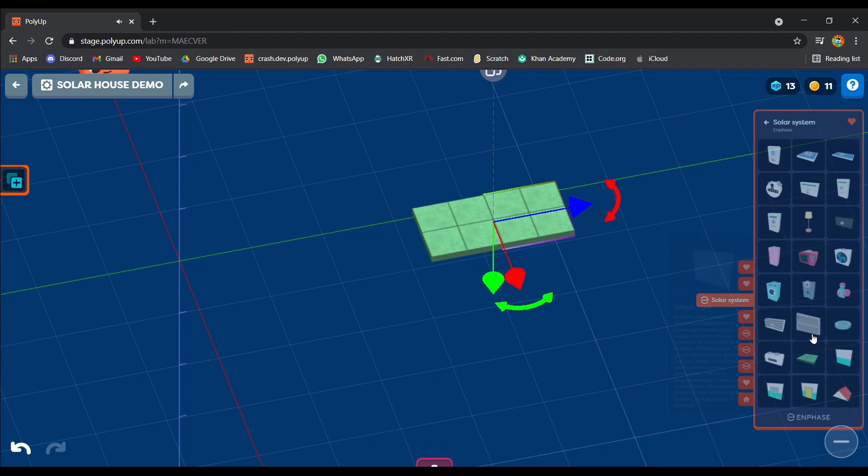In the previous video, I explained how the parts work, and in this video we are going to be constructing a house. Let's start with the floor. Now I'm going to add the walls. And finally our roof.

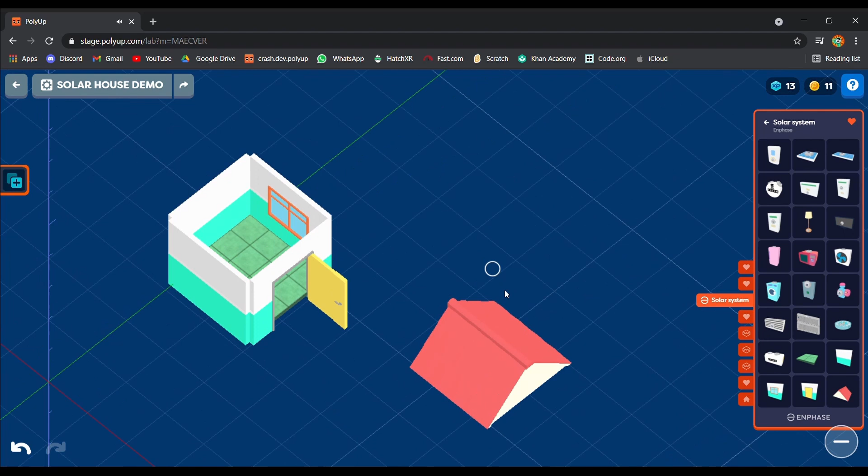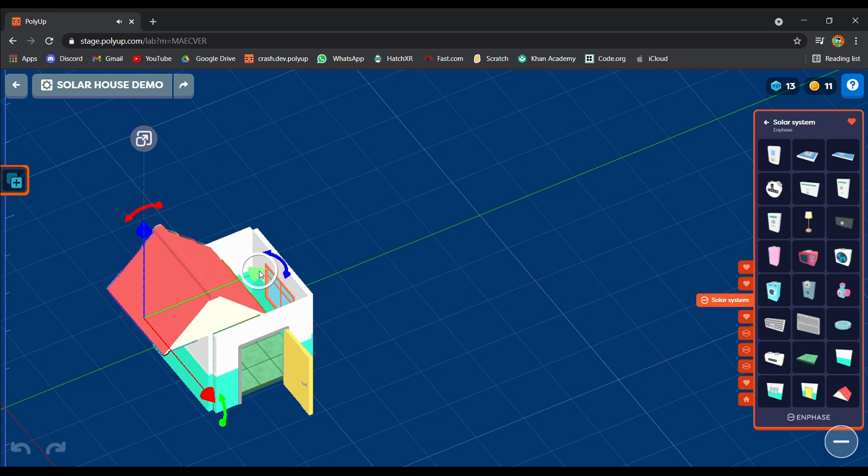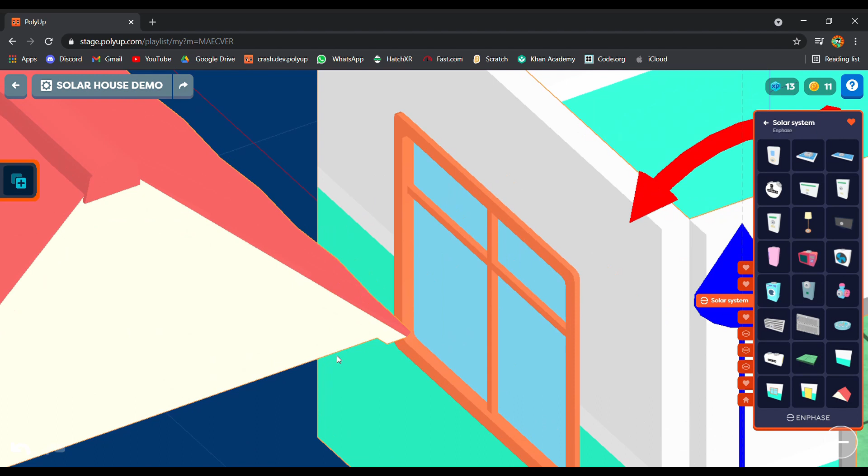Now I'm going to add some other stuff that will help us. For that, I am going to slightly move the roof with the help of these arrows. Remember, shifting the roof does not mean we are disconnecting it, because when I click on the first tile, that is the parent object, everything highlights. It has an orange glow near it, which means they are all connected.

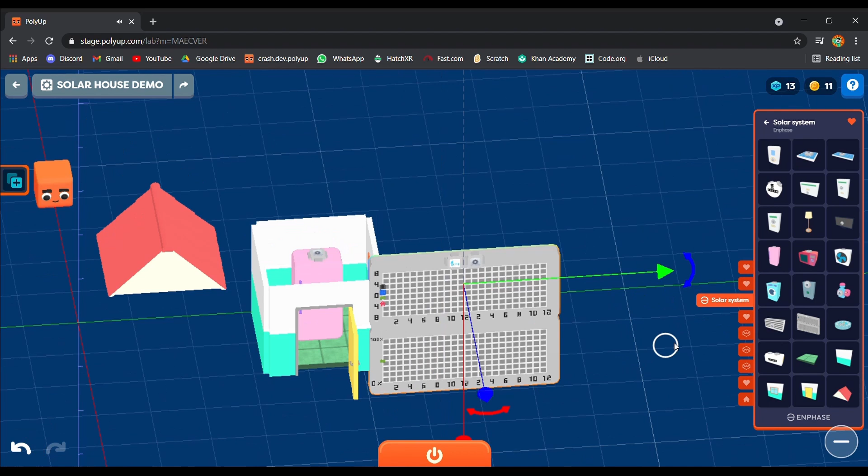I am going to add a fridge because we can monitor it the whole time, as it is on throughout the day and night. Let's also add a graph so that we know what is happening. I'm also going to add a clock to know the day or night time. And finally, a device electric meter or the power grid meter.

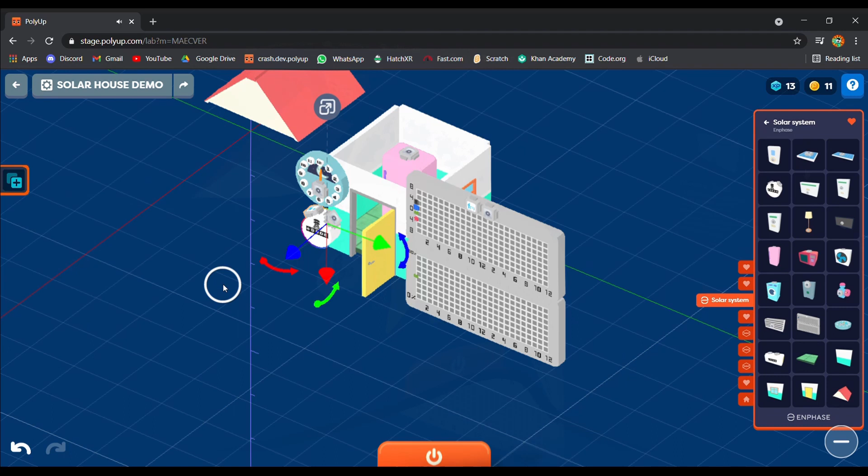Since no key elements, that is no microgrid controller, solar panel or battery is connected to this house, the appliance won't work. But something interesting happens when we add a circuit box, that is the microgrid controller.

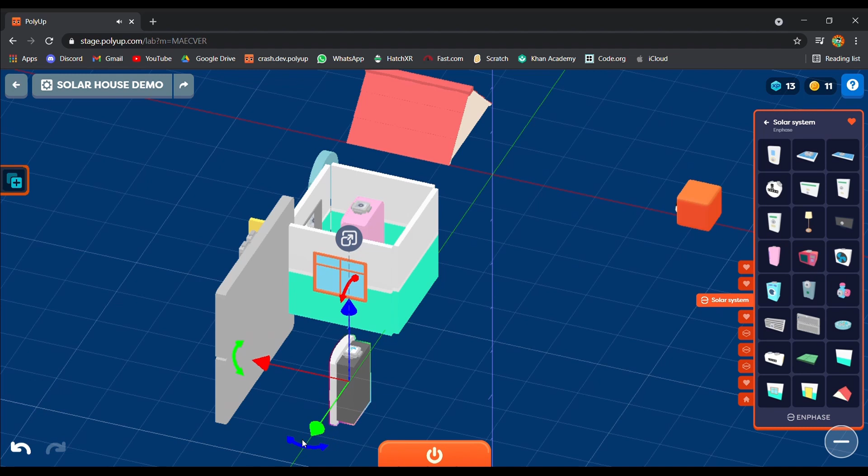As you can see, the fridge is working. That is because the electricity is coming from the power grid. We can see it on the power grid meter and on the graph.

On the graph, the black line represents the power grid, the blue line represents the solar panels, and the green line represents the battery. The red home icon represents appliances.

As you can see, on top of the center line, there is a black line, which means the electricity is coming from the grid. And below the center line, there is a red line, which means it's going to the appliances. We can see that on the circuit box as well.

If the circuit box is blue in color, it means there is full power. If it is green, it means the appliances have full power. And if it is lime green like this, it means the batteries have full power. If the circuit box turns yellow, it means it is taking power from the grid. And if it is orange, it means the batteries have some amount of electricity in them. If it is red, it means there is no power.

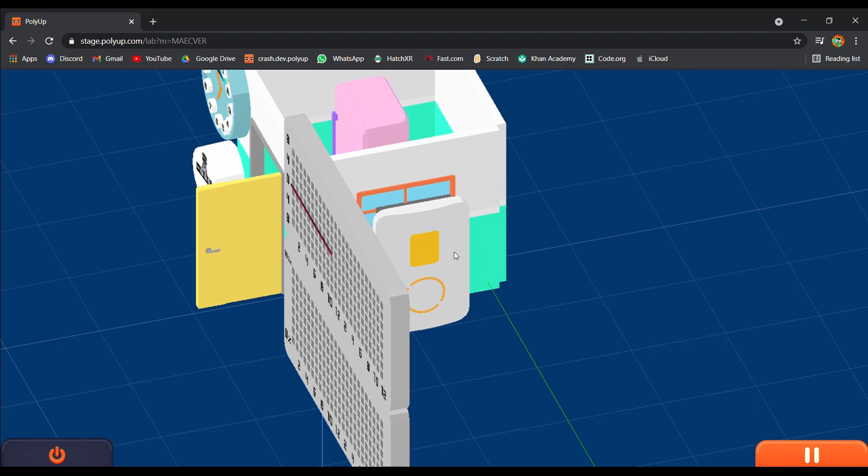The fridge did not work when we did not have a circuit box because the circuit box controls the power usage of appliances. Without it, we cannot get electricity from the source.

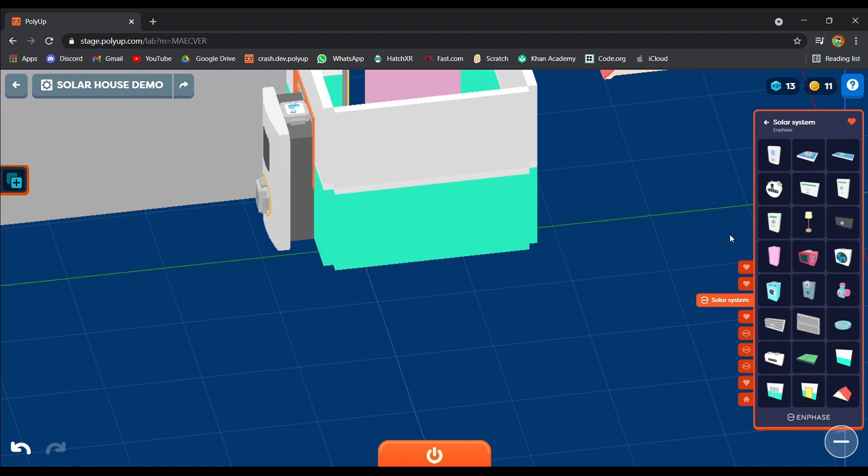Now I am going to add some batteries so that we need not get electricity from the power grid, at least for a few days. These batteries charge with the help of solar panels, but we are not going to add that now.

Let's see what happens when we add only the batteries and the circuit box. As you can see, at first the batteries supply electricity to the home appliances. This is because by default the battery starts with 100% charge, and we can see its percentage on the bottom part of the graph.

We can also see on the device electric meter, that is the power grid meter, that no electricity is coming from the grid. But let's wait and see what happens when the batteries run out of electricity.

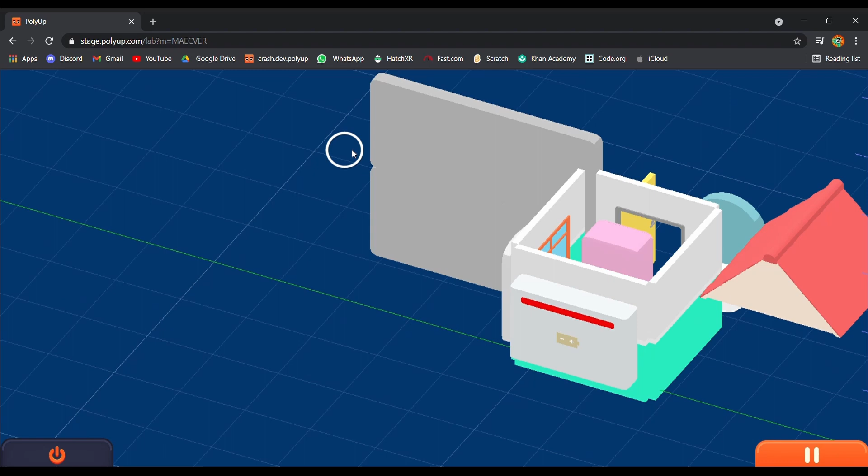As you can see, the batteries have 0% electricity, and the electricity is coming from the power grid, which is the black line. As you can see, the battery is red, which means there is no electricity in the battery. If the batteries are red, it means very low or no power.

If the batteries are orange, it means power is draining from the batteries. If they are green in color, it means the batteries are full. If the batteries are yellow in color, it means they are about to be full.

But now I am going to add the solar panels. As you can see, now the batteries are charging with the help of the solar panel, and our house is self-sustainable.

As you can see in the power grid meter, that is the device electric meter, no electricity is coming from the grid, which means there will never be a power outage in our house even if there is a grid outage.

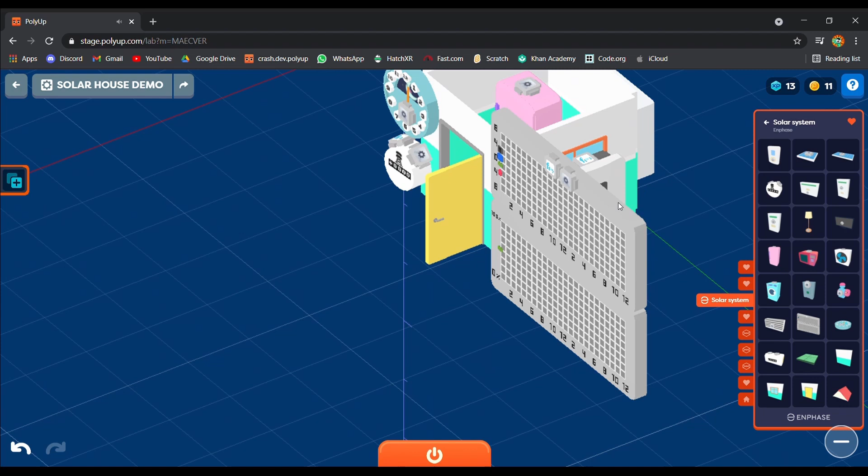But when more appliances are connected and there are less solar panels and less batteries, it will be hard to supply the house load, so it will take electricity from the grid. Let's add some appliances and try it.

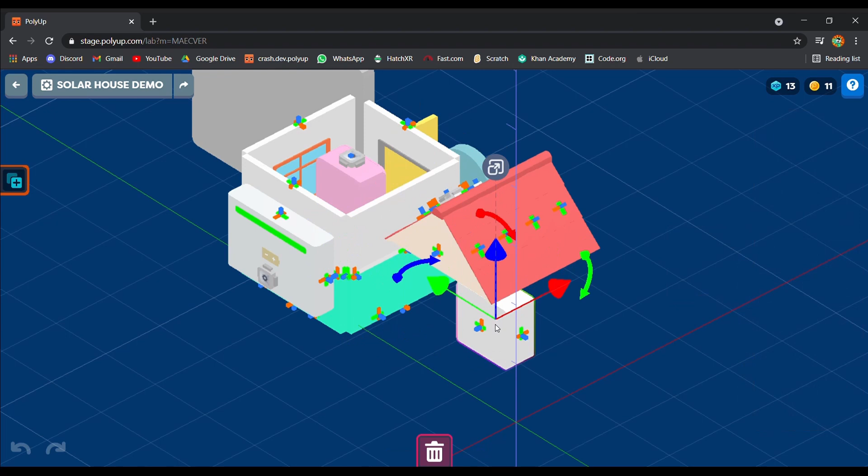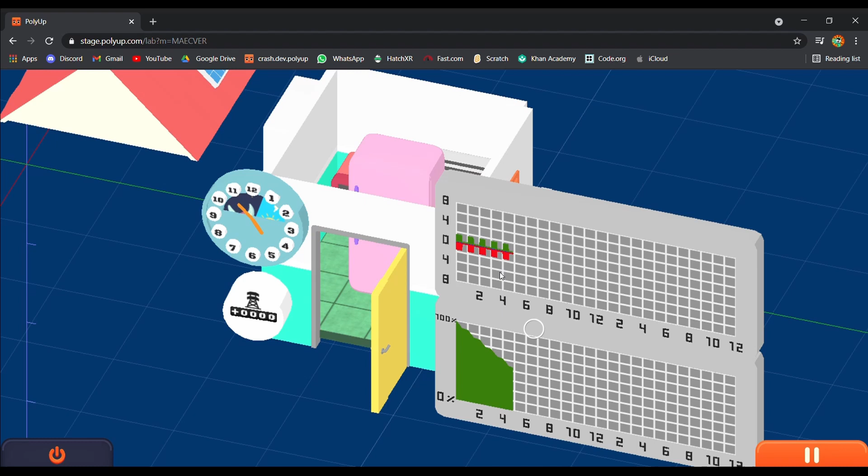As you can see, there is more load and the battery's charge is going down drastically. As you can see, the battery's charge is finally over and the power is coming from the grid. You can see that on the grid meter as well.

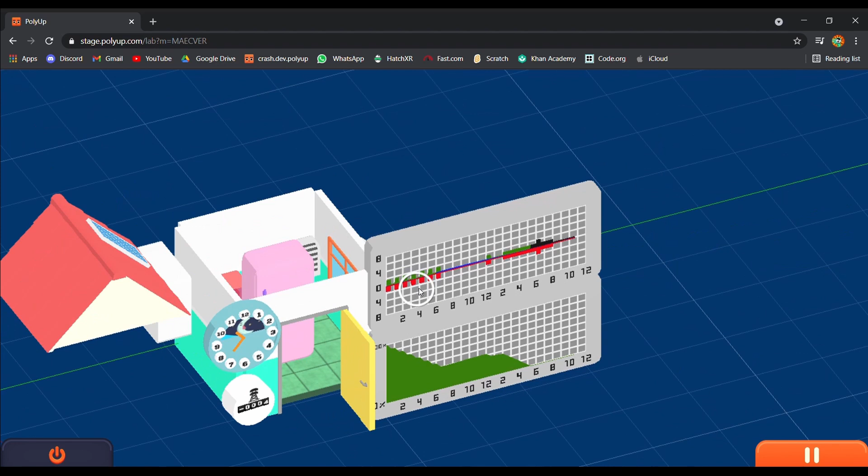If we want our house to be fully self-sustainable even in this situation, we need to add more solar panels or more batteries.

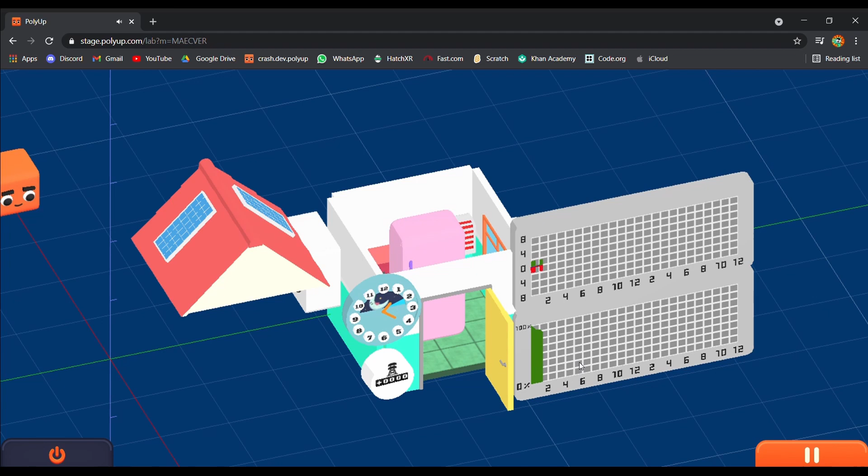Now I have added some solar panels, which means our house is fully self-sustainable. We can also calculate the amount of energy used by our house and the amount of energy we need to produce to fulfill the house load, which we will be doing in the next video.

Here's a sneak peek of what we will be making in the next video.